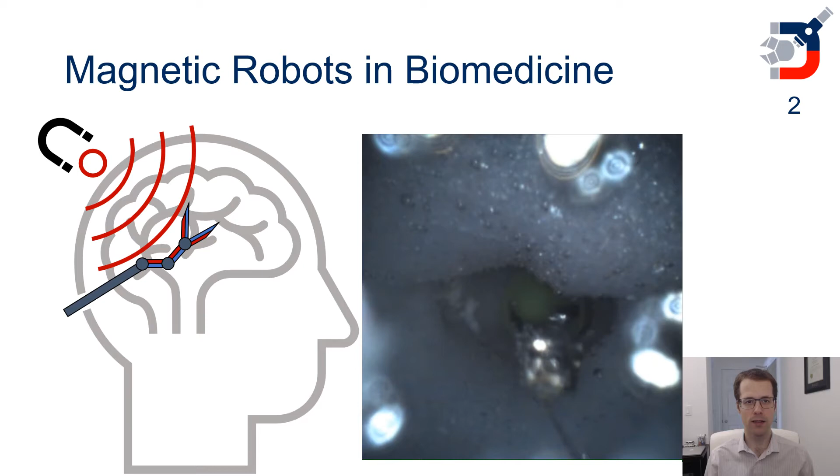To avoid this buckling behavior, we wanted to investigate designs that use rigid pin joints instead of compliant elastic joints. However, rigid pin joints do not provide the restoring torque that is necessary for multi-degree of freedom magnetic robot control.

However, we realized that in magnetic robots, we already have embedded magnetic material for actuation, which you can see here in this example robot. So in each of the moving links, we have some embedded magnetic material that we will use for actuation. But what if we could also use that magnetic material to provide a restoring torque by playing with the interaction between the magnets themselves?

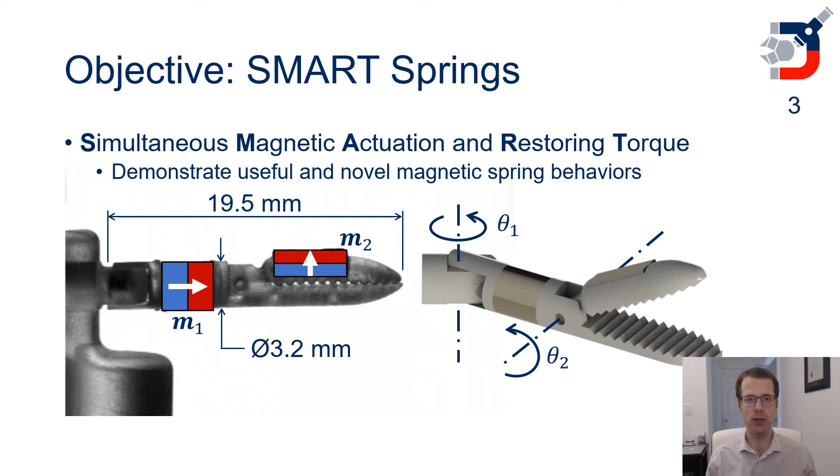Then we could simply add another magnet in the base of the robot, and by changing the relative positions of all three of these magnets, we can control the restoring torque that is present about the two joints. We called this idea simultaneous magnetic actuation and restoring torque, or SMART springs for magnetic robots.

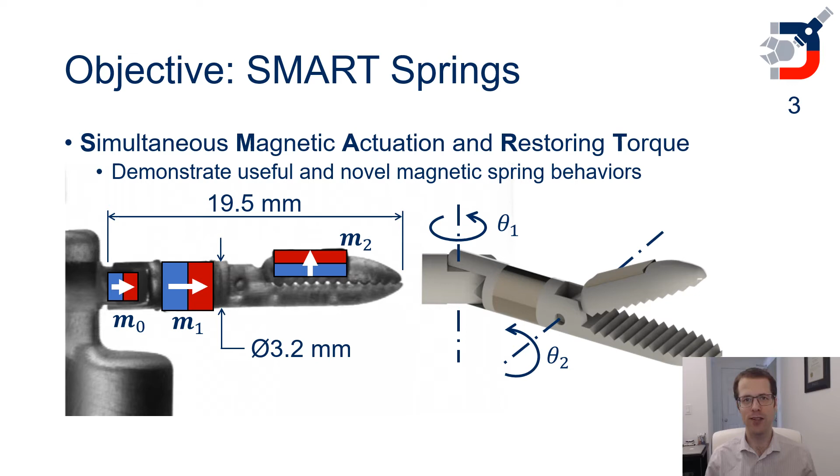In this work, we will show how you can design these SMART springs to demonstrate useful and novel magnetic spring behaviors. Here we will examine the analytical model for the SMART springs and discuss some of the relevant geometry. Here we can show two embedded magnets inside of two links that are connected by a pin joint.

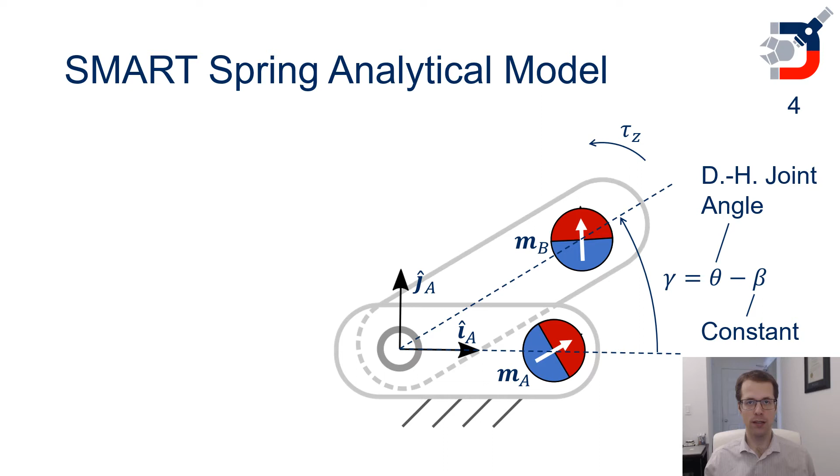We can define a spring deflection between the two magnets as gamma, which is going to differ from the Denavit-Hartenberg joint angle by some constant angle beta. As link B rotates about the pin joint, there's going to be interactions between the two magnets that causes some component of restoring torque about that pin joint.

This torque is going to be a function of the spring deflection, but also the radial positions of the magnets and their relative orientations. Overall, the spring torque is a function of many different parameters. So to simplify our analysis, we used dimensional analysis to define a unitless torque. The unitless torque tells us about the shape of the torque function rather than its magnitude.

And from that dimensional analysis, we were able to greatly simplify the relevant parameters to only three. The dimensionless torque itself is defined by the torque divided by an amplitude constant C, and the R bar value is a characteristic length ratio that describes the geometry of the joint. The amplitude constant is defined here, and it determines the overall height or amplitude or stiffness of our spring.

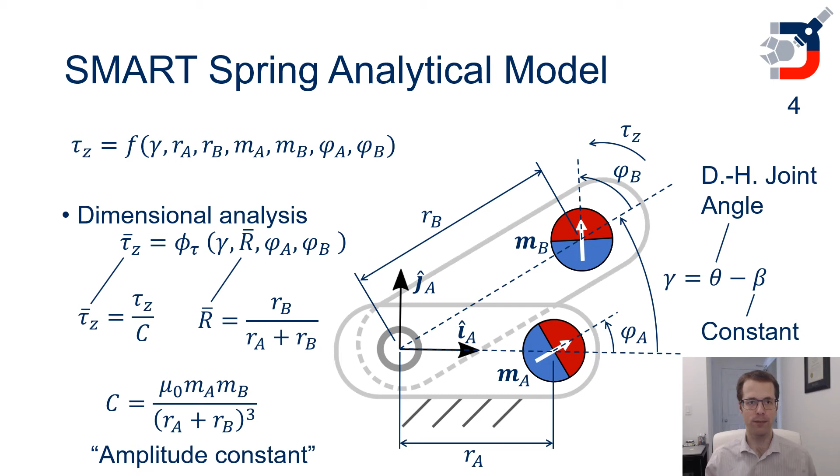So how do we use this analytical model to come up with a design for our SMART springs? First, we need to consider how we want the robot to behave in response to an externally applied magnetic field. This is the case for any magnetically actuated robot. Those actuation considerations will likely determine values for phi A, phi B, and MB.

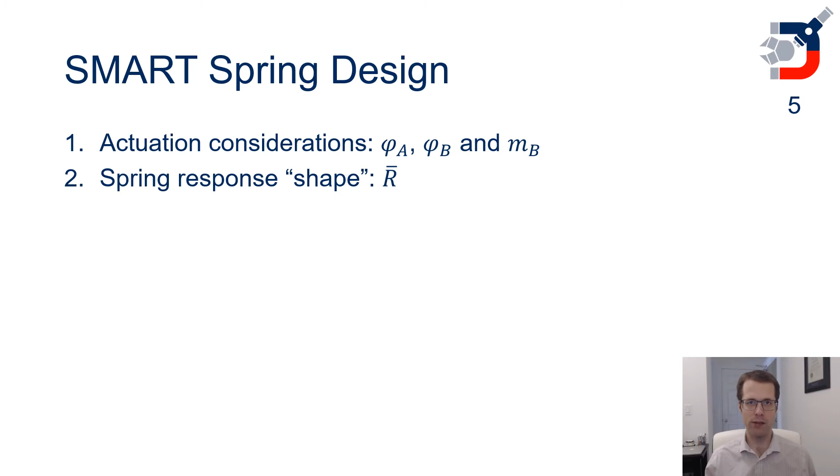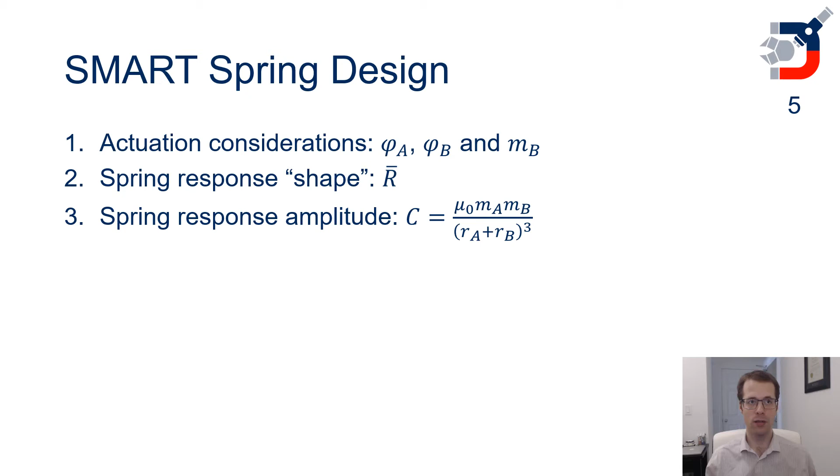From there, we will consider the spring response shape that we are looking for. This shape could be defined by the location of the equilibrium points, or whether we want, say, a constant stiffness spring within a certain range. Next, we consider how stiff we want the spring to be, or how high the torque should be for a given position. This is determined by the spring response amplitude constant, C.

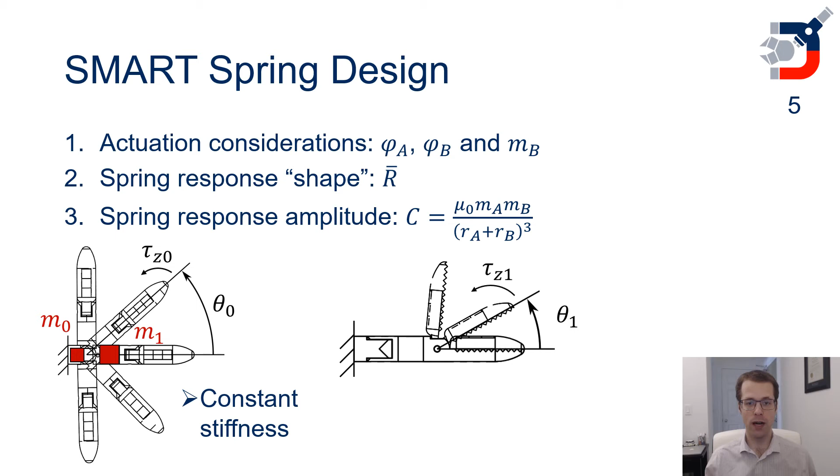To examine how this works in practice, we will go over two examples. This robot has a constant stiffness wrist, and we will achieve constant stiffness by tuning the parameters of M0 and M1. And then we will also be examining the same robot with a bistable nonlinear response for its finger and an unstable equilibrium point somewhere around 45 degrees that causes it to snap between an open and closed position.

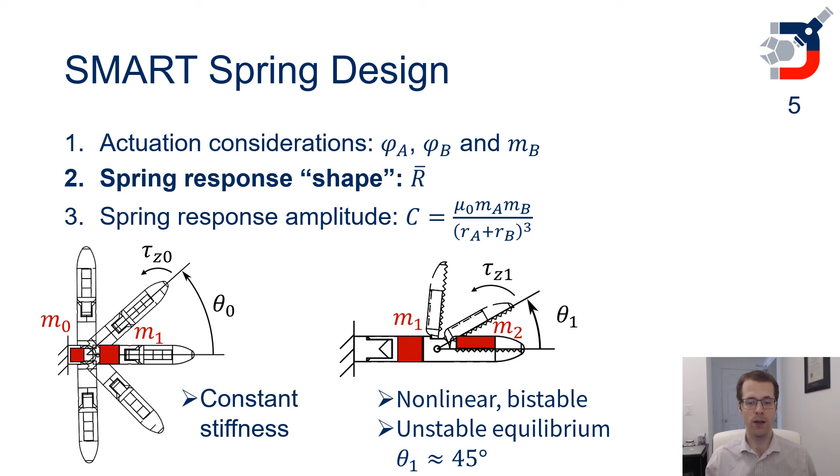And we will achieve that by modifying the positions of M1 and M2, all in the same robot. And mostly we will focus on the spring response shape because that is the unique component of this analysis that is crucial to the design of smarts.

First, let's examine the behavior of the wrist joint. Based on the actuation considerations, we decided that the values of phi A and phi B should be 180 degrees and 0 degrees respectively. From there, we can start to examine the behavior of the equilibrium points as we change the characteristic length ratio R, and that is shown in this plot here, where the stable equilibrium points are shown by the blue triangles pointing down, and the unstable equilibrium points are shown by the red triangles pointing up.

As you can see, as we change the characteristic length ratio, the number and position of the equilibrium points changes. We wanted to have a stable equilibrium point at around 180 degrees, and it was easier to manufacture joints that had characteristic length ratios between 0.8 and 1. So we chose that range to really narrow in on.

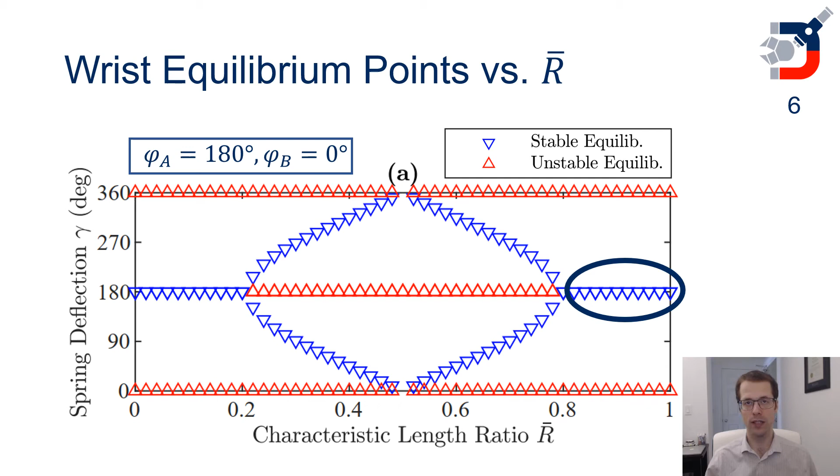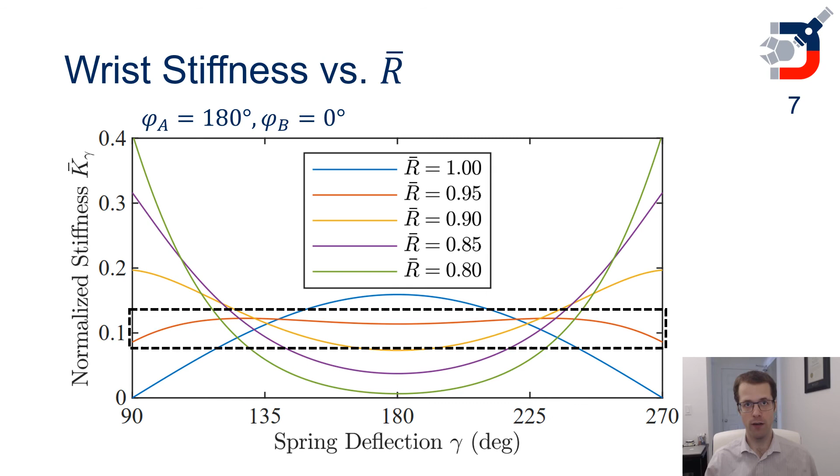From there, we can look at the specific wrist stiffness in that range of R bar values from 0.8 to 1. And so here we've plotted those responses in several different colors, and we're showing the normalized stiffness as a function of the spring deflection. And we want to have a stiffness that is very nearly constant. And we can see that the one that comes closest to that is at an R value of 0.95. Further tuning would result in an R bar value of 0.94 for this to get the very nearly constant stiffness.

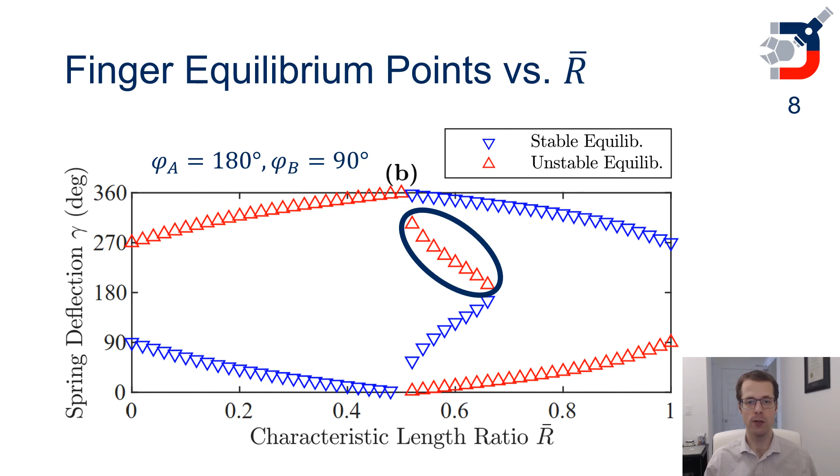We performed a similar analysis for the finger equilibrium points. I won't get into as much detail on this one, but again, we were looking for a certain position for the unstable equilibrium point, and that restricted our range of possible values of R bar to a very small range, which I've highlighted here with this circle.

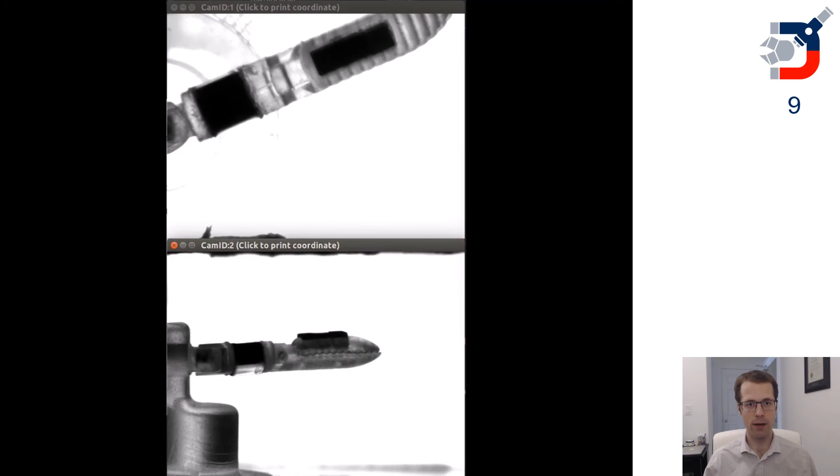This is a video of our final robot design. After selecting the value of the amplitude constant, we have fully defined our robot, and this is simply to show that the qualitative behavior of the robot is what we were looking for. Although we were hoping for a smoother sort of transition in the wrist, friction was causing some issues there that made the behavior a little bit jerky. However, we can see that we can control the wrist and the finger independently, and that the finger snaps rapidly between the open and closed stable states.

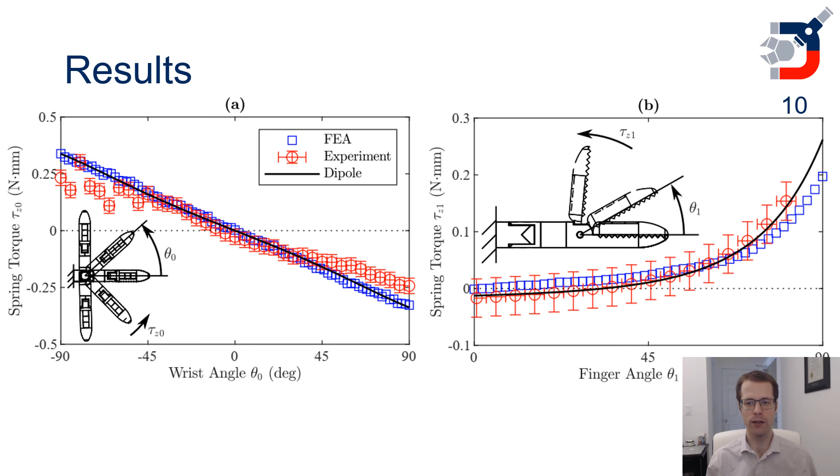The finite element analysis also agrees reasonably well, although it predicted a very different equilibrium position for the finger than the analytical model predicted. This is likely because of the rather large length to width ratio of the finger magnet, which is not well modeled by the dipole model. However, the experimental results showed very good agreement with the dipole model, so the applicability of the dipole model seems to be quite good for these particular cases.

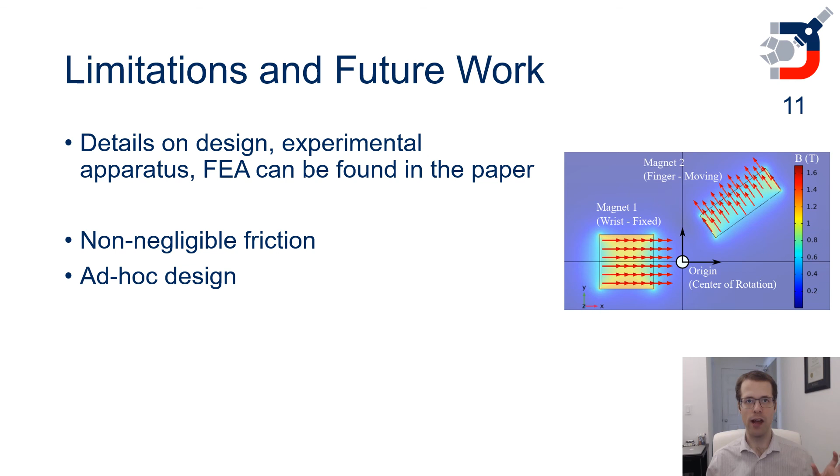In terms of limitations and future work, first of all, I'd like to mention that due to the limited time, you can find more details on the design, the experimental apparatus, and the finite element analysis in the manuscript itself. In terms of the limitations of our work, we had non-negligible friction, and we could see that in the video where the robot was controlled and it showed not quite as smooth a behavior as we would have liked. We also had a rather ad hoc design methodology. It would be nice if we could have an algorithm where we could plug in some desired behavior and it would spit out the parameters that we need to achieve a given desired behavior.

In future designs, we could have as many as 3 different stable equilibrium points within 180 degrees. And we could also examine cases where the magnets are oriented out of plane, as well as robots that have more than just 2 degrees of freedom.